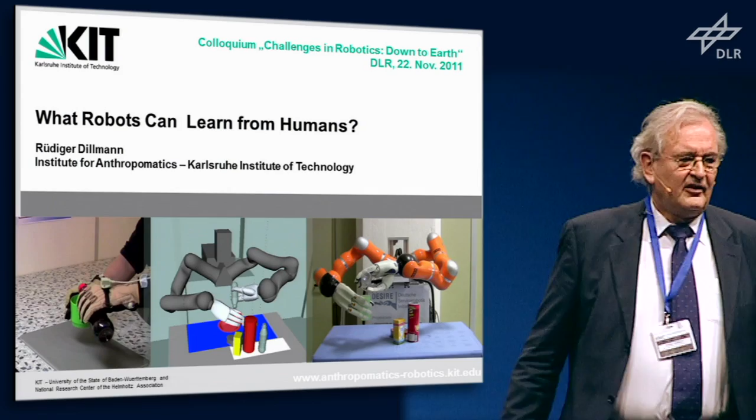I think here it's time to go down to earth and study what really can be learned. Learning is something which could be done. We can observe that with humans. I think Giulio gave very impressive examples of what can be learned, what are the failures, what are the successes of learning. But the problem is how a machine can learn. Can it learn itself? Can it learn by other robots? Can it learn by humans? And how to teach that?

My roots started at the beginning with the first robot, a Puma 500. We started to program that, looking for the code, then starting to program it very close to the machine. This was very cumbersome. I did learn from tool machining that there is a language, APT, which is wonderful if you read the books. But then how to make a robot do that - describing objects, describing trajectories, describing actions.

Later, we continued developing some languages. We started with Algol-like languages to program robots. Pascal came later. It was a very structured programming language with discipline. You had to structure the program and define all libraries necessary for that.

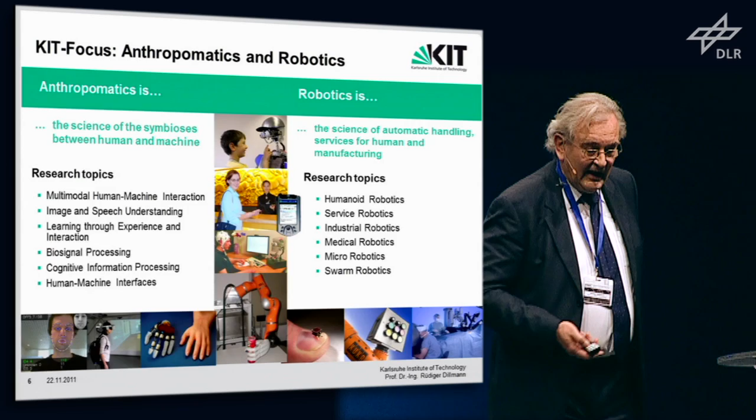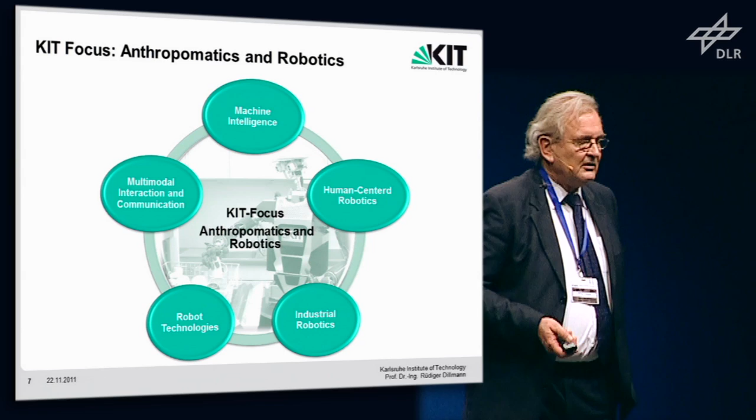So at a glance, anthropomatics comprises these areas, looking for the interaction of humans with machines. On the other side, looking to robot technologies, industrial robots, space robotics - we never have done that in Karlsruhe - so it's a good complementary activity between these our locations and to go forward.

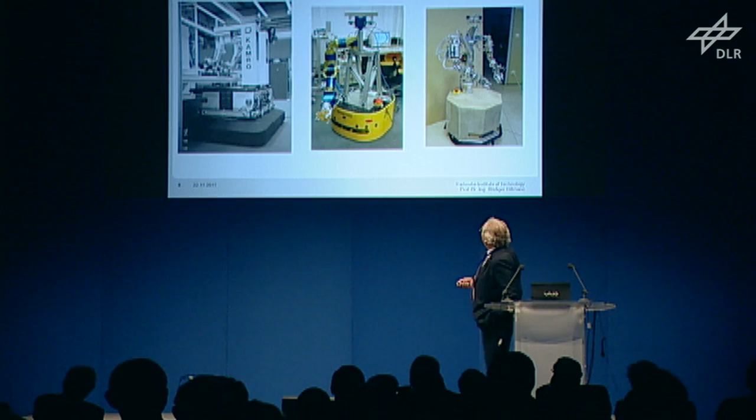Looking back, in the 80s we started to build completely autonomous systems, omnidirectional with Mecanum wheels, having two Puma 260, a lot of vision systems. At that time we had no laser, so we used sonar. And what was possible in a manufacturing environment: to go to a place, to dock at a place, to take work pieces, driving to another station, doing some assemblies, and then to do it completely planned and in an autonomous way without interaction and intervention. This was in the late 80s.

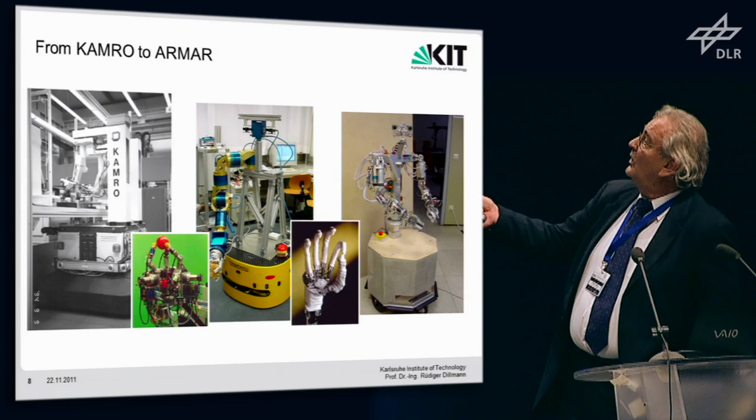Also, the first multi-finger systems have been developed. It was 3 joints, 3 fingers, and we had 4 fingers, and then it continued to today's systems. Here, one study on an arm with 7 degrees of freedom, studying how to map from human manipulation to a 7 degrees of freedom arm. It was a very rigid arm.

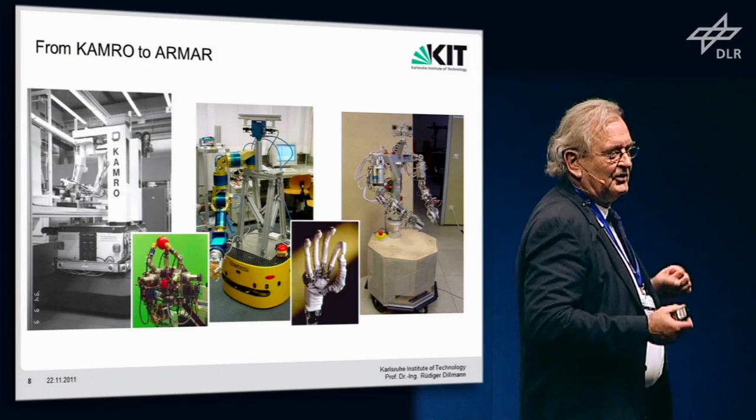And then building the first two-arm system, which had some analogy to humans. It was Tamim Asfour designing this machine, combining it with a mobile platform and starting. From there, we studied programming, learning, trajectory planning - all these parts with these machines.

Technology evolved, and actually there are two humanoid systems - it's ARMAR 3A and B. They work in a concrete environment. They work in a kitchen. This is our benchmark to do defined work.

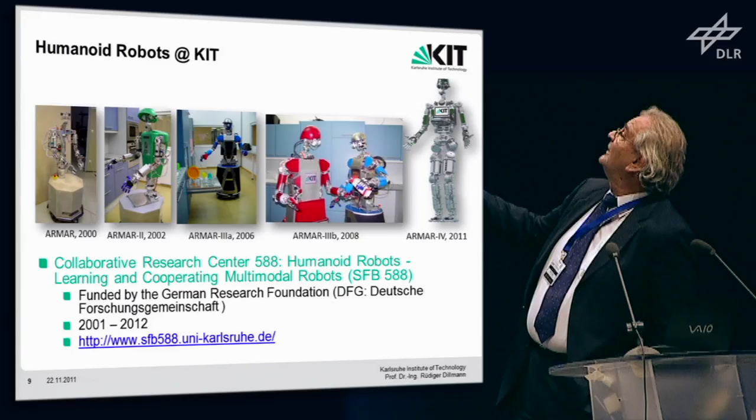And this machine, which is very close to being finished - actually the feet and the upper legs have to be assembled as a humanoid robot. So the work to be done for that is, if you're looking to the materials, to the mechatronic parts, as we have seen in the last day.

Going back - to have electronics, embedded systems, algorithms, sensors to generate representation internally. And then on the other side, the question of how to teach these systems. This is the crucial part.

The idea was to demonstrate, to observe, and to map it on the machine, using knowledge about human motion and about the human body. Everyone knows it's not possible to map it directly from the human body to the machine. This is an approximative process, so it seems that the robot is doing similar things.

Then applications: speech, gesture, mimics. The multimodal interface has to be understood - gesture, pointing gestures, etc. And then the hand is identified as a very critical point.

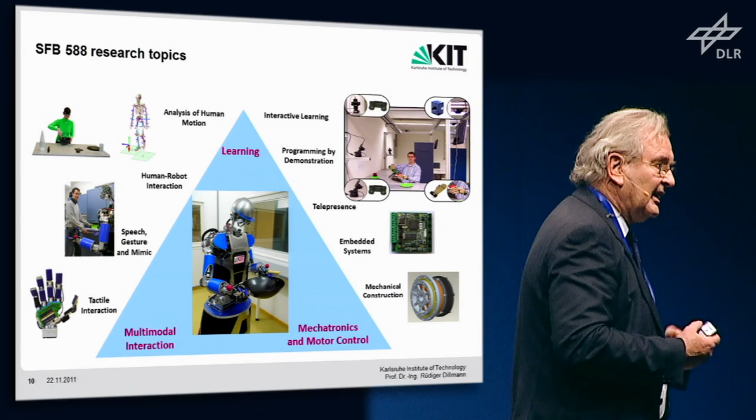From the mechatronic part, we had developed various generations of hands with hydraulics, with pneumatics, with electric motors, trying to make them better and better, more adaptive, and more similar to the human grasping point.

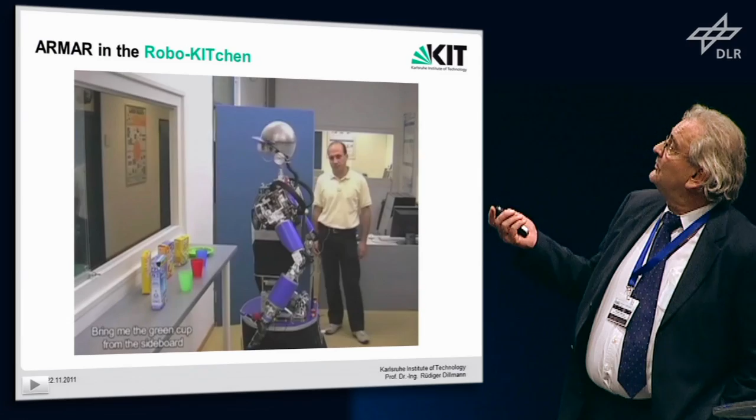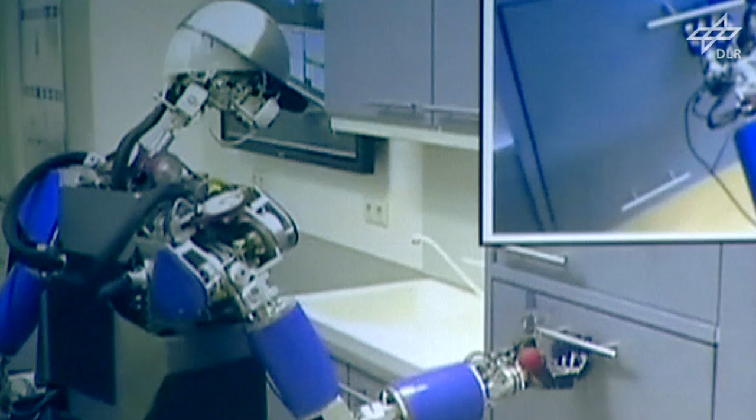Here is one demonstration where the robot interacts. We have accelerated the speed with time 4. You see it's still today very slow to interact with the robot, to make them work in the kitchen like humans. Even children can open the fridge and take out something more easily than robots are doing that.

So this is, for example, one benchmark in the kitchen: loading the dishwasher, unloading the dishwasher, making the dish. Everything is done with a control loop. It has been demonstrated, mapped, and then made to have the robot do it.

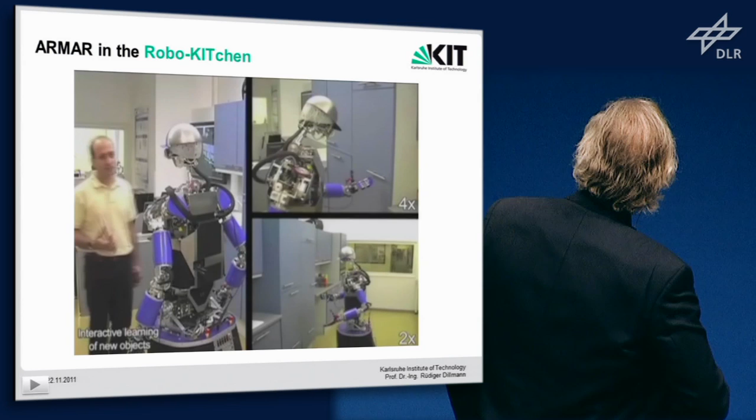Here's one example where the question is, what is this? This is a spoken dialogue - this is a book, but the robot is not able to read the book. It's a book on control theory. So you can ask, what is this? The robot says, this is a book, but you don't know what is inside.

So this is some of the problems where semantics are necessary to understand what to do with this, and maybe for what it's useful for.

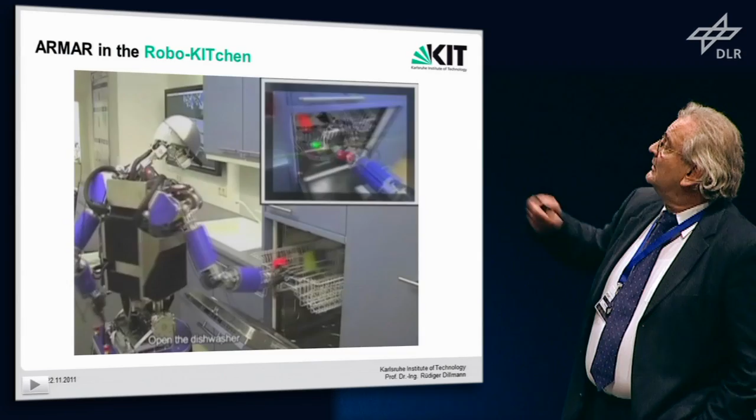Here are applications using the hands, recognizing this is a kitchen without markers, without anything. It's a natural one, and the attempt was to do that while interacting with humans.

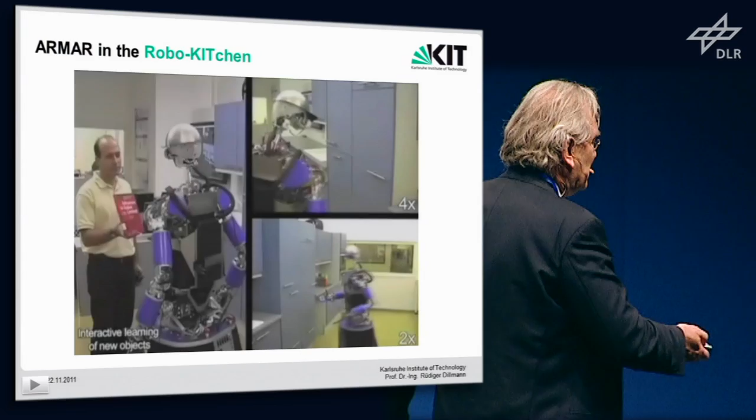So it's not so catastrophic as Giulio said at the beginning of his talk, with the sketch where the interaction was a catastrophe. Okay, then some examples of coupled interaction.

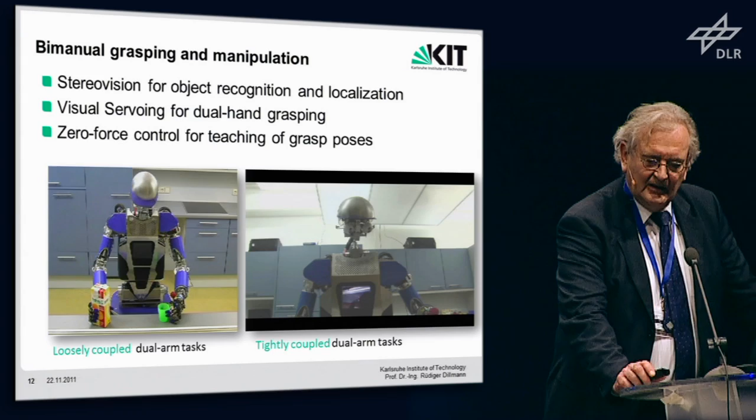Pouring is something which is studied also by a lot of other groups. Handling objects with two hands, so it's loosely coupled, or also handling of objects which are tightly coupled.

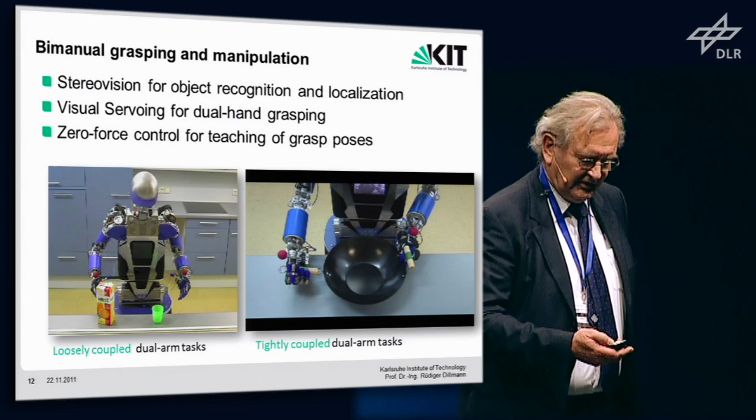And to do it in a reasonable way, everything is done online with planners, RRTs, or variations of RRTs, which allows finding the right grasp, coordinating the arms, and avoiding obstacles.

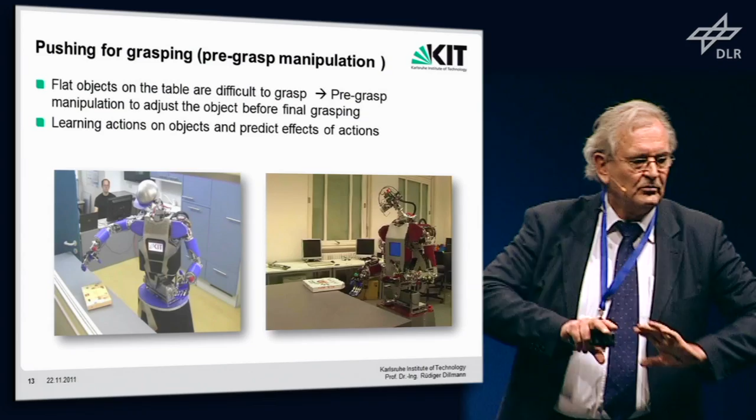So then here we have grasping, pre-grasping - the robot has to estimate if it's possible to grasp it, maybe it has to move it, and then be able to do something with this.

This seems very simple, but if you look in terms of learning to understand the principle behind it, then you see that this is a crucial part to make it work and generalize it to the robot.

These are some examples. You can also study doing something with the surface, like cleaning and following the surface, and use sensors, haptics, and integrate that.

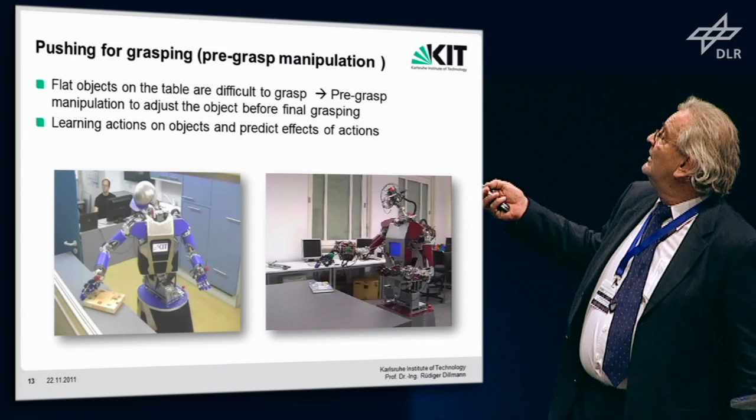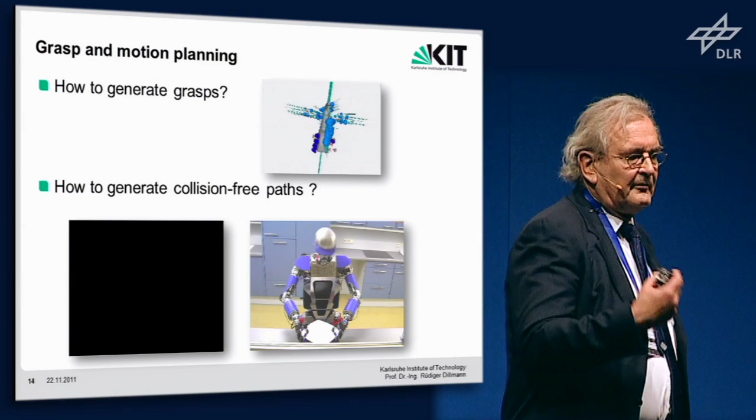Okay, how this works: there are various planners with models taking data from sensors, shaping the data, and then generating a lot of grasps. Some people say the robot is dreaming by night.

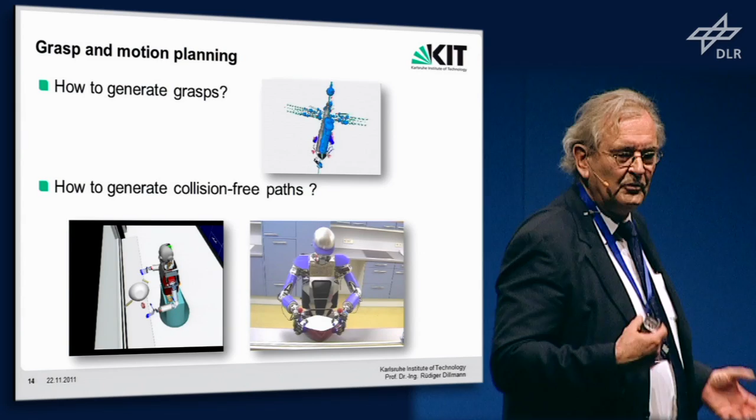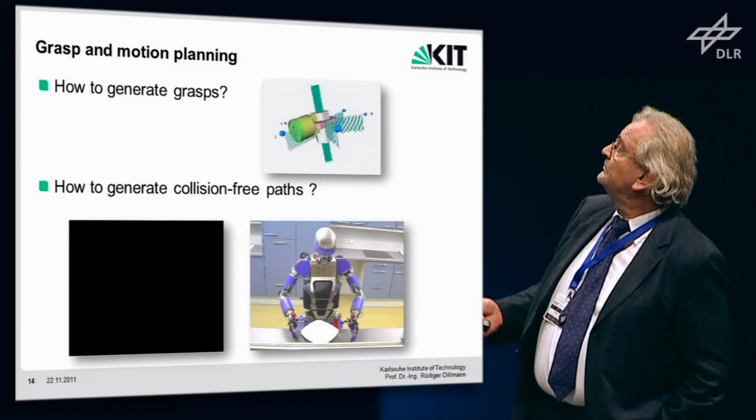This means the simulator computes all possible grasps, selecting the best one, generalizing that, and then they can be used online. During execution, it's necessary to know where the right arm is, where the left arm is, if there are obstacles, no collision, coordinating that with the environment.

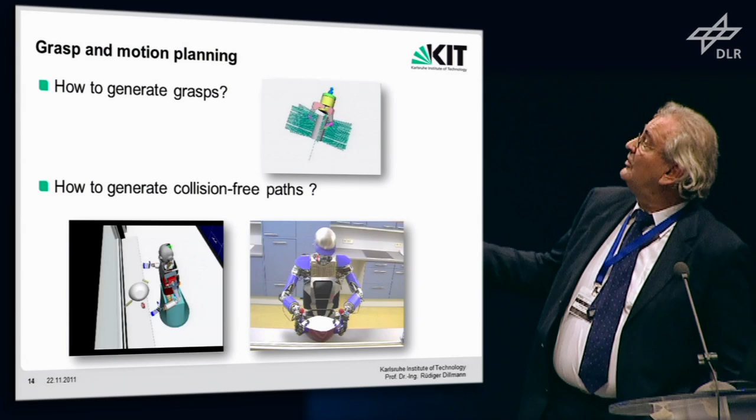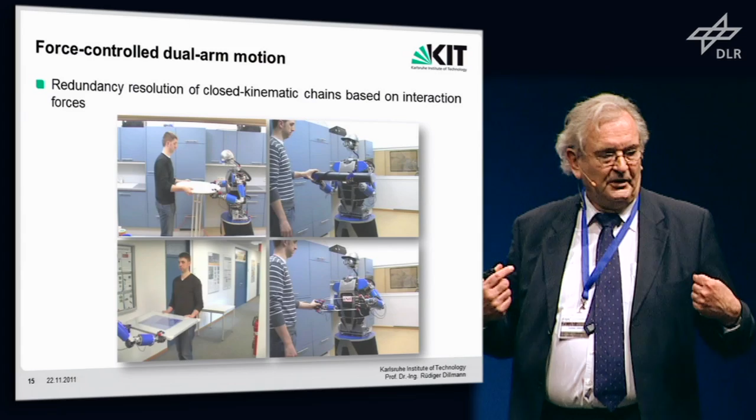Or if the robot cooperates with humans together, this has to be also observed. So here is one interaction with humans where forces have to be detected, and where a human is cooperating with the robot, moving one object - but it's also possible to interact with machines.

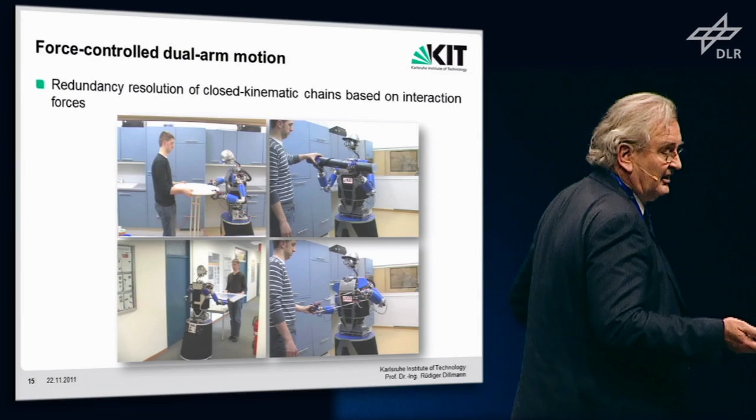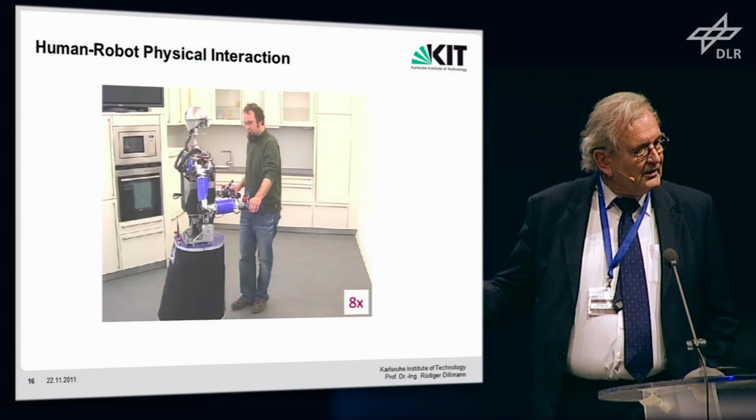In this sense, taking it on the hand, taking on both hands, maybe dancing, as we have seen, to move the machine. The robot must know the intention, must follow the tactics, the tactile and force interaction it observes. It's not yet a tango, but it shows the principle of how this could be done.

Now maybe some work on how to instruct the robot. One is to observe the robot with sensors, and I will show you that, to have some mathematical representation. The big lack is that from the language side, the dialogue is very poor from my point of view. I think it's very good that we explain people with spoken speech, make an example, and then other humans understand and can do it.

Another situation is, for example, if I ask another person, help me, then very quickly the other person understands how to help, maybe to grasp something, or to help pass the stairs. But if you say to a robot, help, this is hell. To explain what to help means, a big dialogue is necessary, how to support.

And I think there is a big area where activities are necessary. I think Greg Hager said something about the vision community - he said, where's the state? And I asked him, where is semantics? And he said, 10 years, 20 years from now. I think this is necessary if we speak on spoken speech, on explanation.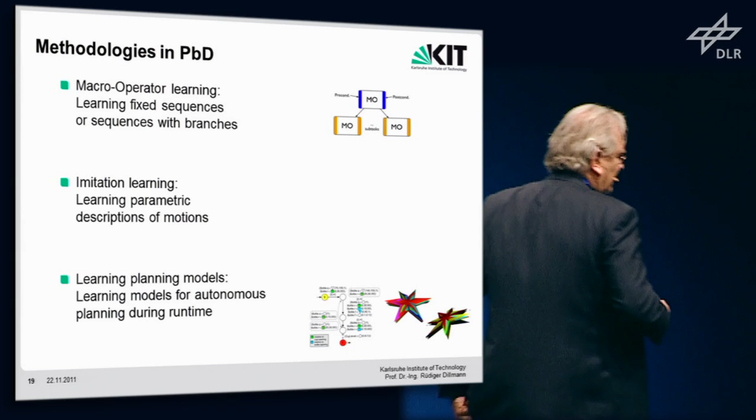Another part is learning how to plan. This means to acquire planning knowledge, so that something like strategies can be learned, which allows the robot to deal with exceptions, with uncertainties, how to use the sensors in this situation - not in an unsupervised way, but together with humans. And this is learning planning models.

I very shortly explain what is behind that. Otherwise, okay, you can come to courses in Karlsruhe and listen to how to do it. So this is the cycle of learning.

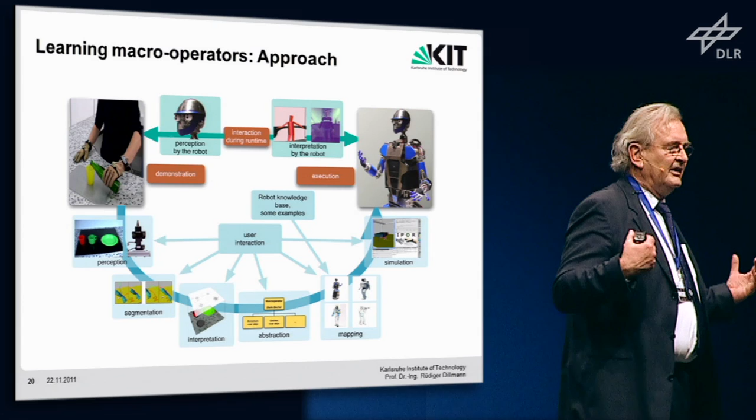At the left side is the human demonstrating something. You see the data gloves. We use cameras, we use markers, different techniques to observe what humans are doing. Then having a trace of images and of trajectories, of action sequences. And this is a technique of how observation could be done.

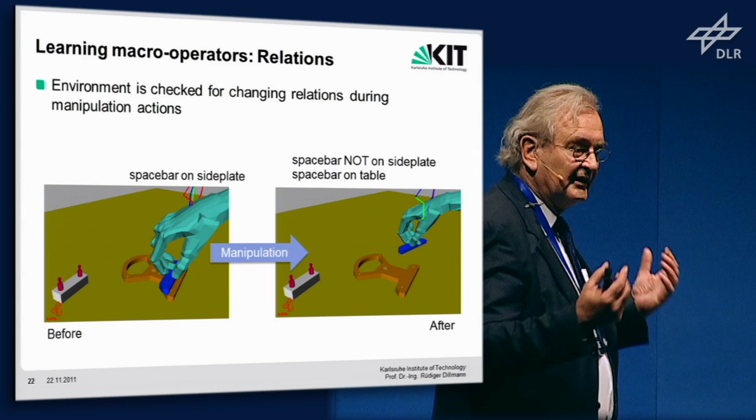Internally, we generate representations like that, maybe of the objects. This is a test bed, we call it the Cranfield benchmark. It's used all over the world to evaluate programming, coding, testing, and how to make it running.

The results you see here are an abstract representation, which can be generalized, and then you compile it. It's not a typical one-to-one compiler. It must adapt the actions to the physical target system and then generate a so-called flexible program doing that.

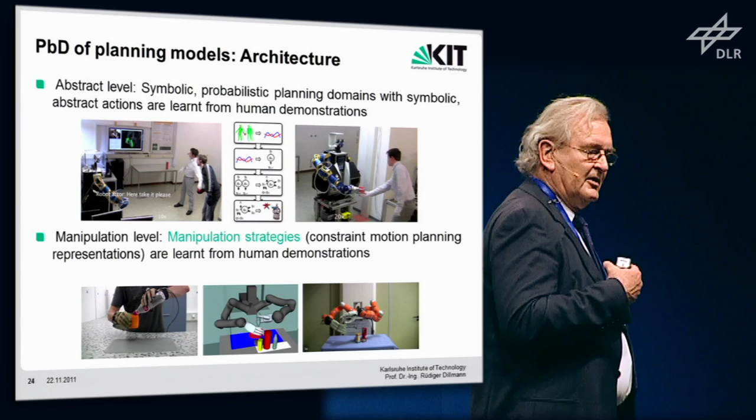Here you see another situation where two persons are doing something. It's also possible to have a trace, maybe to acquire spoken signals, where one person says 'bring me this,' and then the robot observes what happens after the words 'bring me a bottle.' The robot can learn this, and later, if a person says 'bring me the bottle,' the robot can start to bring the bottle because it has seen how this could be done.

This can be generated, but it's a little bit difficult to generate the plan. It generates a type of graph, with arcs and nodes. In the nodes are some decision-making processes, maybe supported by humans, by human input, or supported by observations, by sensors, or exception handling. This seems to be a very flexible method to represent this.

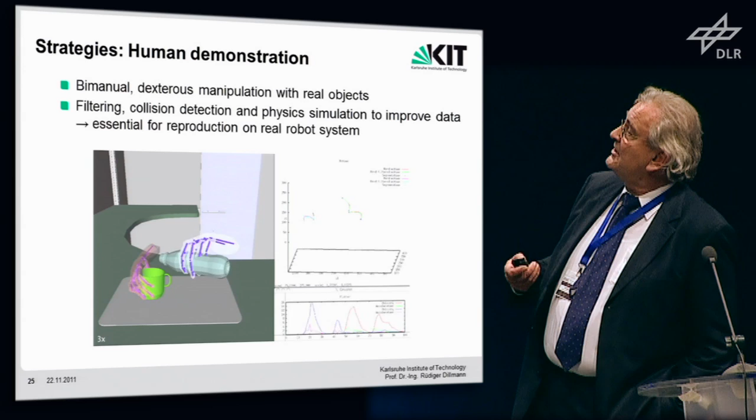Here you see some examples. On the left side there's a pouring example, the internal representation in the computer, and then the mapping on a machine. Here you see a sketch of how this is presented, the trajectories, the velocities. You can also have other relations observed.

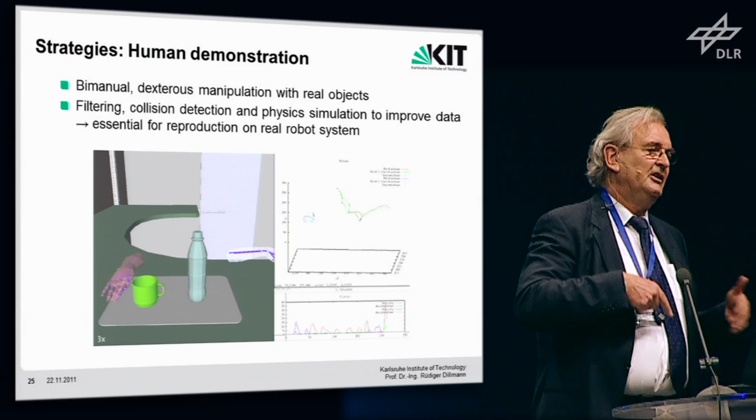Taking this data, you segment it to generate a meaningful, useful sequence of actions, which is parameterized. This is important. So the result may be something like this: a sequence of actions, of nodes and arcs in a graph. It's also possible to have some parallel actions, and also possible to have loops, if this is an activity where cyclic tasks have to be performed.

This is a representation which can be translated to a robot. Important is maybe what is doing the left hand, what is doing the right hand. This depends on where the robot is, where the objects are. There is some local decision necessary to decide this.

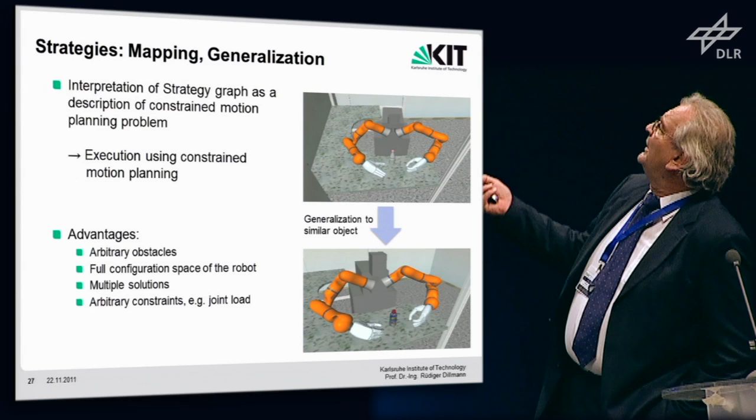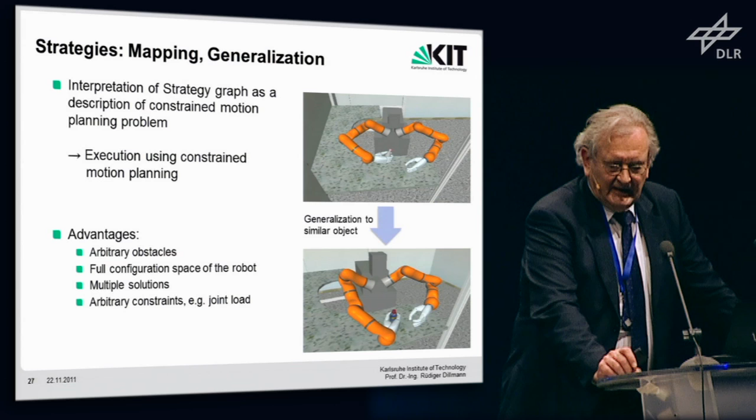This shows now some experiments we have done. These are two arms, lightweight arms with 7 degrees of freedom. This is a study we had done together with the DLR in a common project, where we studied how to plan and how to execute that, also using hands which have been developed at DLR.

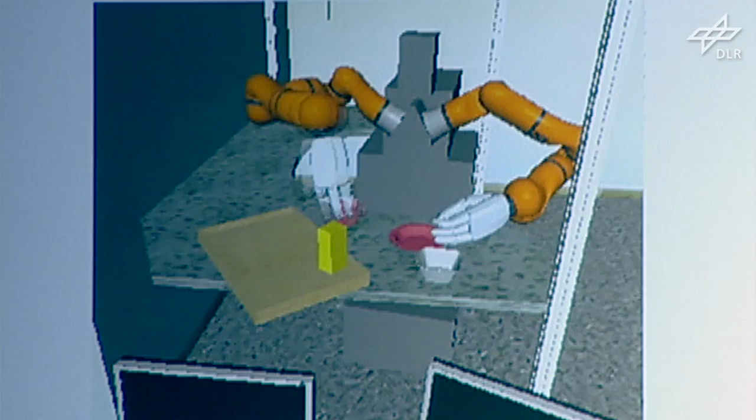So this is the principle of what happens internally. The nodes may have some parameters, then there is an action, the result of an action, and maybe there are constraints which have to be fulfilled. Maybe there are uncertainties which require observation, expectation of what happens, what may happen, so that the sensor system knows what to observe, when to observe, and how to interpret. This information is necessary, and then you can get such a graph.

For example, if you grasp a cup, and in the cup is something, then you must hold it in some way, you must know how the gravity field is, etc. Internally you have a representation like that, representing the constraints, for example for pouring, what is necessary to do that. And then if you have that, you can generalize it and apply it to different pouring applications.

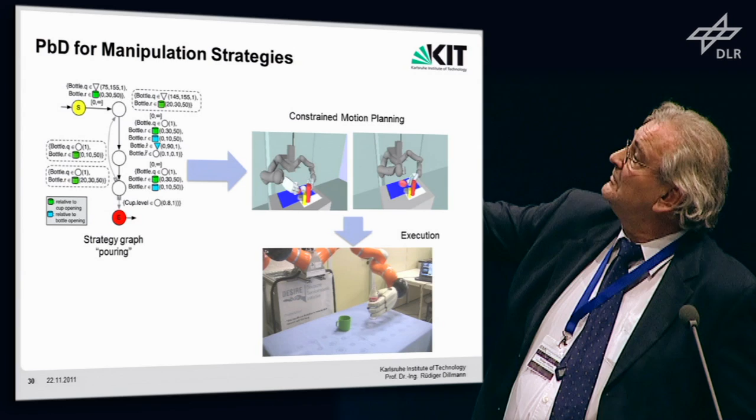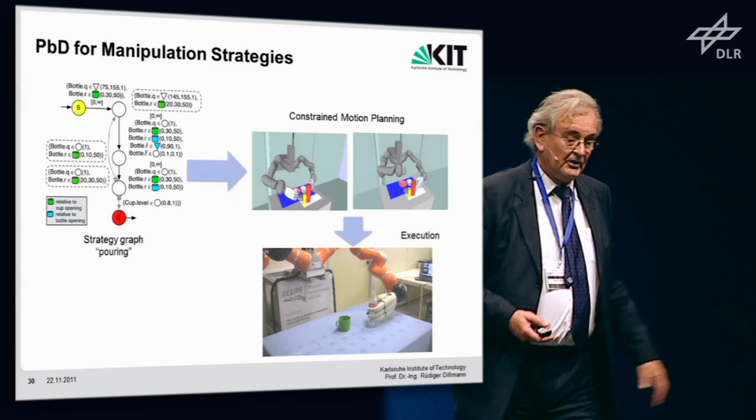Of course, the result here is to have a strategy graph like that, which is a type of program that can be learned. If there are some nodes where there are too many uncertainties, maybe the robot asks for advice, maybe to get some help, or to get a better demonstration to be able to execute that. This is possible today, but it's still cumbersome to implement such a system in this way.

So this was a short overview on learning. What I can say is: be careful when we speak about learning. It's a question of what we are speaking about, what a robot can learn, what are the capabilities, what are the constraints. Even if we have the big robot cloud in the background which can be accessed, at the end, the mechatronic system, the sensor system, must work, and the representation must be mapped directly onto that.

So I come to the end of my talk.

Then, Gerd, I want to thank you very much. Congratulations for your work. I hope we will cooperate all in the future and realize some of the dreams together, and also for your contribution to robotics. Thank you very much.